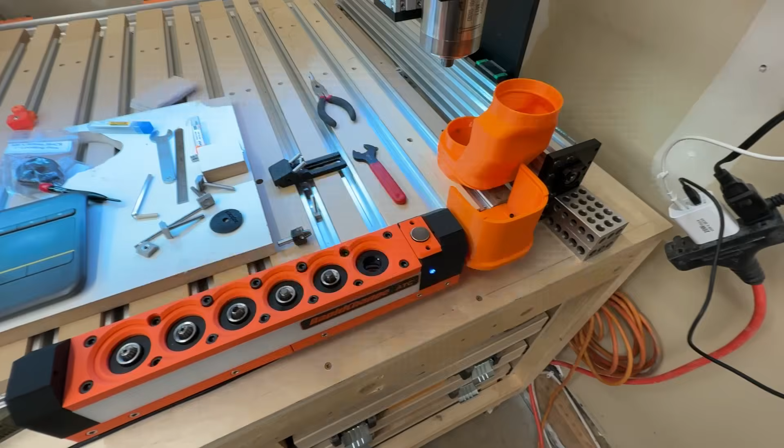All right, so back in the shop after a nice long weekend. Hope everyone enjoyed Canada Day. I know there's 4th of July coming up as well. So hopefully everyone has some nice time with friends and family.

But I'm back out in the shop today, and I've reprinted my Dust Boot docking system, and I need to get that set up. But in order to do that, I need to relocate my tool changer. So I've moved it over to allow for the Dust Boot dock. I'm going to deal with that in a little bit. But for right now, what I need to do is reset up my RapidChange in its location.

I'd seen a couple of questions around how, I bought this thing, now what? So at this point I kind of wanted to go over a video on the next step, so you physically have it connected.

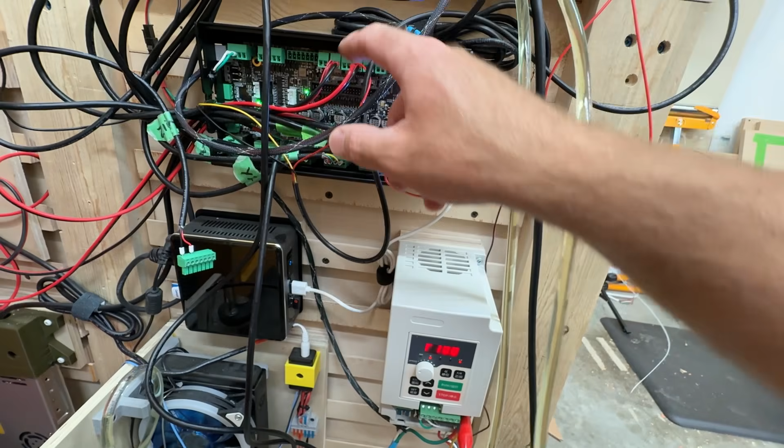In my case, I'm using the tool length sensor port on my Super Longboard and a 24 volt power connection that was available on the longboard. I went over this previously, but basically I'm using this one pin right here, and then over on this side going to the tool length sensor and ground on this port over here, so just stealing 24 volts on this one. I need to clean up some wiring - I've made a few changes and just need to clean some things up. But yeah, 24 volts off of one of the switch pins, and then the tool length sensor and ground pin on the tool length sensor port.

So that gives me power. A couple things to double check when you first have it set up. In my case, I have the RapidChange ATC Pro, not the Premium. The Premium has the dust cover. The Pro has the IR sensor, so there's a break beam sensor between this point and this point to detect collet nuts, and I also have the tool length sensor.

So the setup that I'm going to show you today is mostly for - will it work with an 8 socket setup? Yes. Will it work without the tool length sensor? Yes, there's just some differences, so just keep that in mind. I'm setting it up specifically with my 6 pocket with tool setter with the IR beam break sensor.

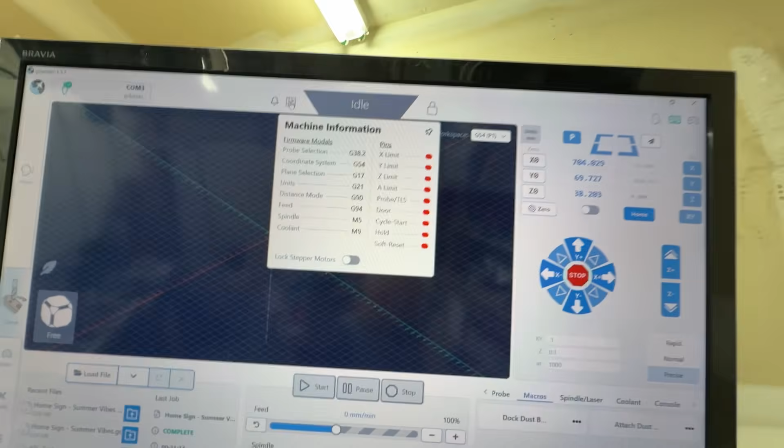One of the first things you want to double check is - I'm using G-Sender, I've got the machine homed. So what I'm doing right now is just putting my thumb in between the socket, and the idea of that is to check that the break beam sensor is getting picked up. So in this case it is.

The next test you want to do is just push down on the tool length sensor. So this light changes from blue to red. Up on the screen, again, we should see that the probe TLS triggers. So that's how we know that we've got it wired up right, and we're ready for that next step.

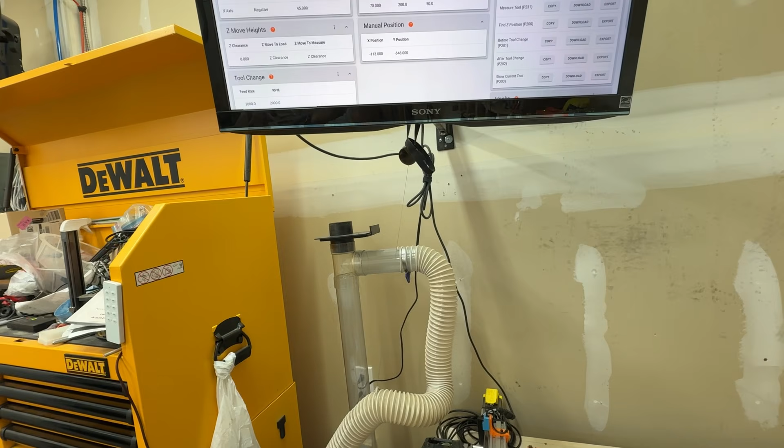So the next step is going to involve using the website. If we go over to - cancel this, I was setting up something else - dashboard. So if we go over to the website at services.rapidchangeatc.com and you log in, you'll be asked to activate your RapidChange magazine. I've already activated mine. You'll get an activation code in the box that allows you access to the portal.

As well, you can pick what controller you're using. Again, in my case, I'm using the Super Longboard, not the external version, just the regular Super Longboard. If you are using the Super Longboard, there is a firmware here that you do need to install. This firmware allows for the SD card to work. If you don't have this firmware or you're on a previous firmware, your SD card on the Super Longboard will not work, and the macros and pieces like that aren't going to function properly. So make sure that you do the firmware update. I'm not going to cover that in this video, but you do need to do that.

So from here, I've got a couple profiles started already, but I figured I would just make a new profile and show you what that looks like. Oh, you know what - it says I'm at the maximum number of profiles. Apparently you can only have 2, so that's fine. This one was a work in progress anyway, so I'm going to delete it, and we'll make a new one. So if you had no profile, you're going to start - it's going to ask, in my case I have one, so I could copy it, or I could just use the default. I'll use the default for now, and submit. Give it a name, and then whether you're in inches or millimeters. I'm in millimeters, so I'm going to submit that.

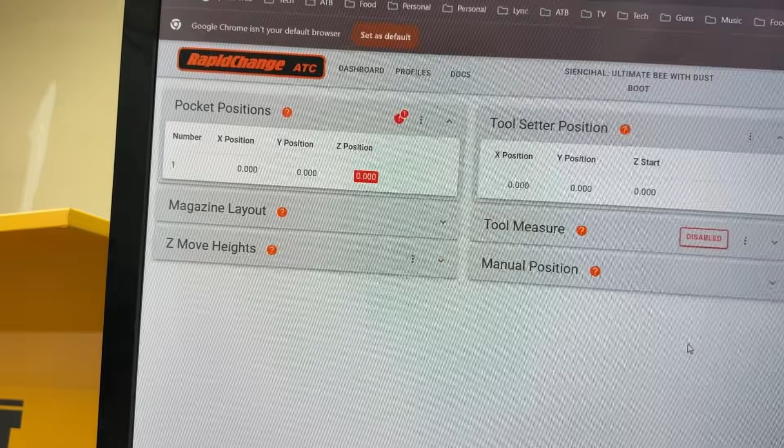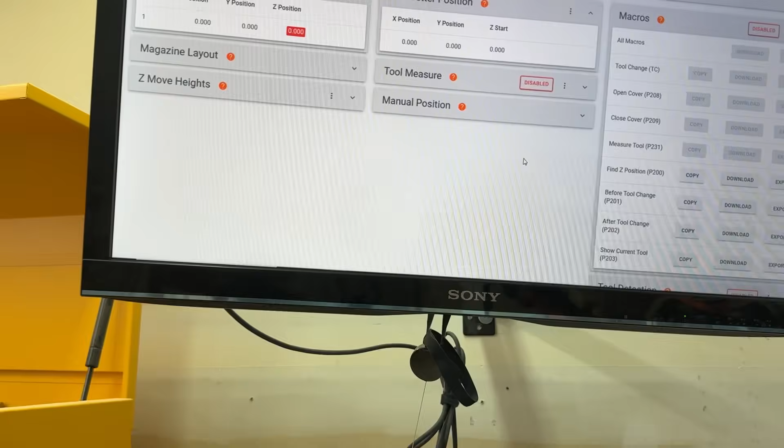And then it's going to refresh, and this is the page you're going to get. So initially on this page, what we need to do is determine the pocket 1 or socket 1 X, Y, and Z positions. I'm going to show you how I do that on mine, as well as how the manual shows you to do it.

Just because I ended up having to print a new top cap because my spindle is quite short, this would probably work in both cases, but my socket, I have a lot more access to the pockets and to see the nuts and collets than you would if you didn't reprint this top cap. So just keep that in mind when I'm going through it.

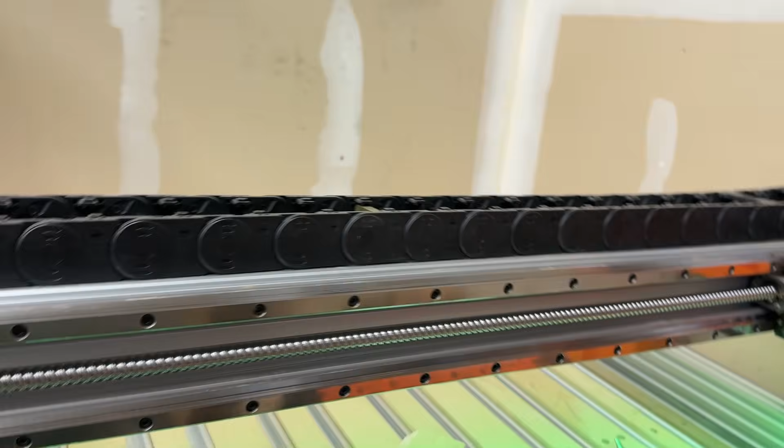But I will show you what both of those would look like. So what we need to do is figure out the machine X and Y and Z positions to get started. That's the first thing we need to do. So in my case, I'm going to go back over to GSender, and I'm going to home my machine. The reason I want to home my machine is just to make absolute sure that I am where I should be.

Because what we're going to do is we're going to tell the machine where to go. So right now you want to make sure that your end stops are nice and tight. Nothing on the machine is changing. You're happy with where your RapidChange ATC is, because if you move anything, the magazine or the end stops, all the machine positions change, and you will have to relocate the magazine.

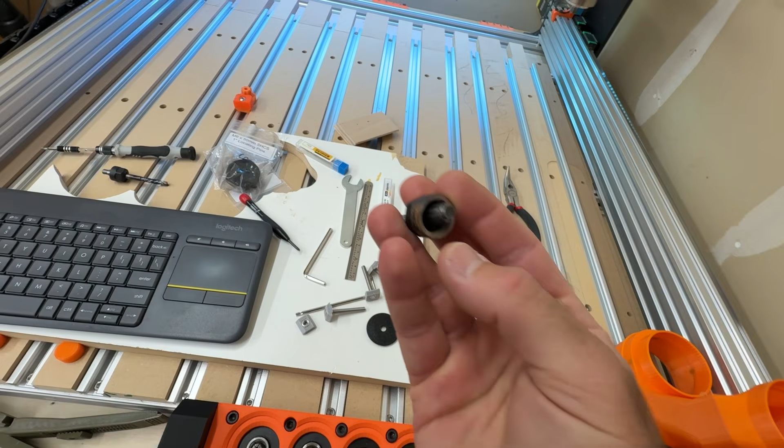So what I've got here, I'll just pull this out, is a standard collet, nut and collet for a 1/4 inch. And this is the included locator pin that came with your set. So in your spare parts and pieces, you should have a plastic piece that says locator on it, and you should have this 1/4 inch pin. In my case, I've got it loaded up in a collet and a nut, and I'm just going to drop that into pocket 1 of my magazine.

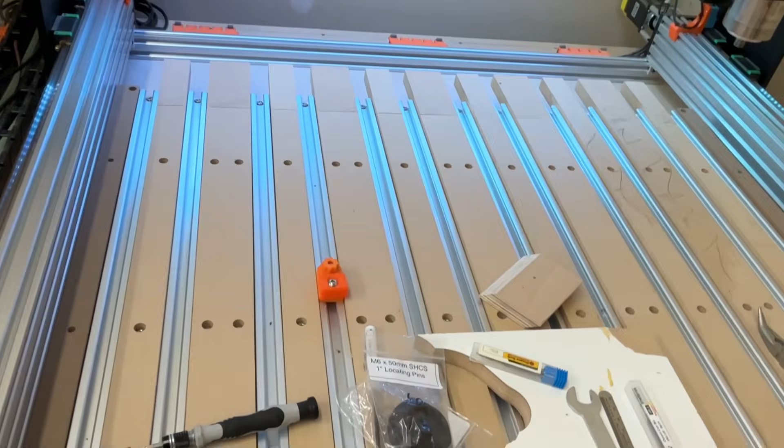Okay, so with that done, I'm going to bring my machine forward. Move over in the X.

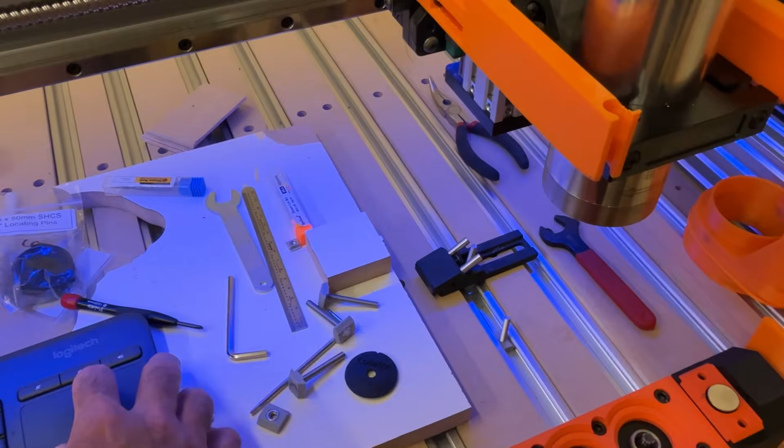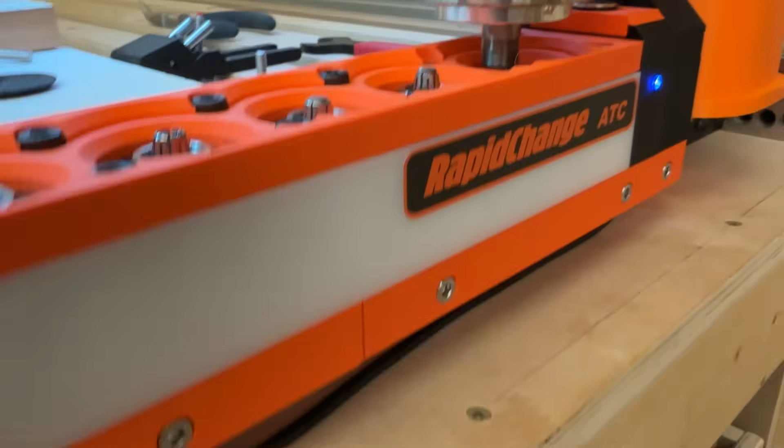So basically what we want to do right now is get it mostly close. Okay, so that's maybe a little too close. I've got it now set to precise, so I've just changed it down to precise. I'm moving 0.5 on the X and Y and 0.1 on the Z right now. Like I said, I maybe got a little too close, so I'm just going to bring my Z axis up here a little bit. There we go, yeah, that was silly.

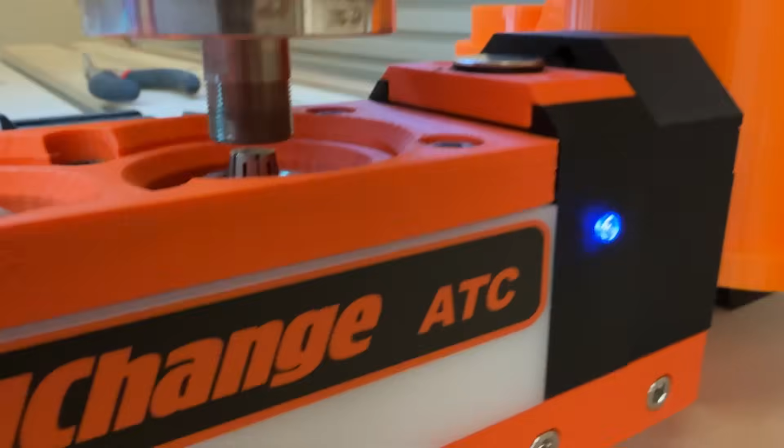Okay, so go to precise. So what we're going to do in my case is I'm just going to get the spindle, go the right way here, to sit over the collet and nut. And then I'm going to bring it down slowly. What I'm looking for is just a nice, it should be centered, sorry about that, should be centered in that pocket and over the collet.

And then bring the Z down a little bit more. And I'm just looking to make sure that it kind of sits on top of, the spindle neck sits on top of that collet nut nicely, which in my case, I think I'm pretty much there, which is good. Okay, so what I'm going to do, point one, so let's go. That looks pretty good.

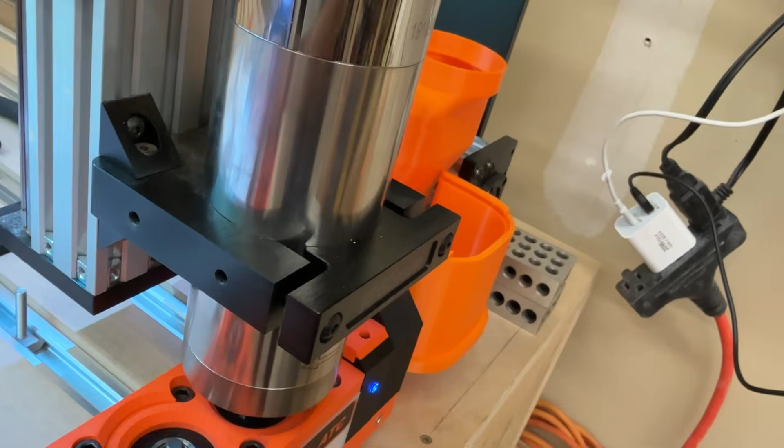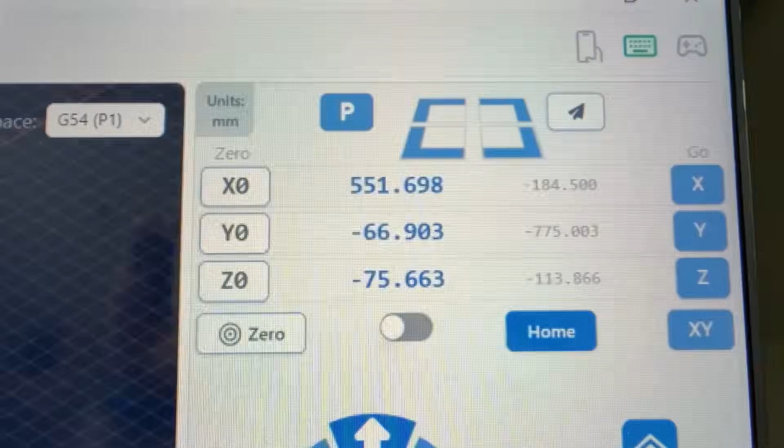Okay, so once you're happy with that, what you're going to do is you're going to look on GSender and you want the gray numbers. So you can see X is at negative 184.5 and Y is at negative 775. I'm not going to worry about the 0.003 right now.

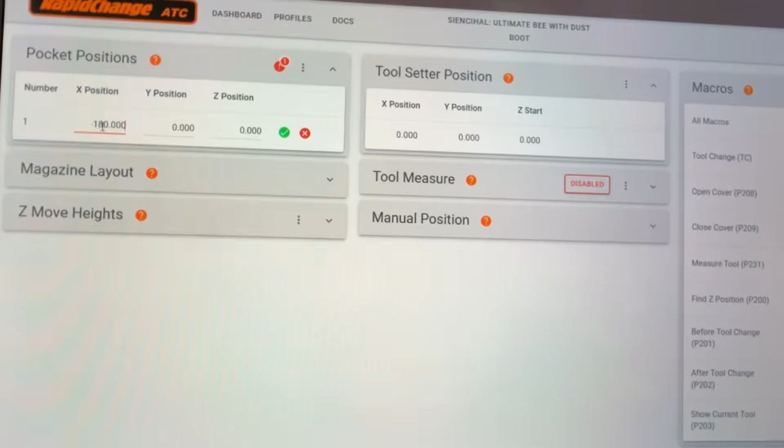So back on the RapidChange ATC page, I'm going to put in the values that I just got. So negative 180, just double check that, 184.5, and tab negative 775. Okay, so now I've got those two positions laid out. I need to figure out my Z position. I'll do that in a second.

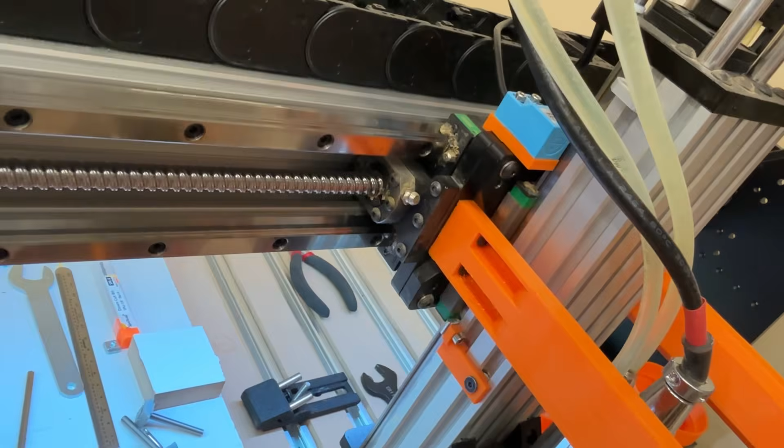Okay, so I've saved that. Now back on GSender, I'm just going to raise this up. So if you were using the regular top cap and not this low profile one, you would take the locator pin and you would put it. Sorry, I got to pull this out here, give me 1 second. So you would take this, set it on something flat.

Okay, so you would get it set up so that it looks like this. And then you're going to put this into your spindle. Sorry, you can't see that, I guess. So you're going to put that into your spindle.

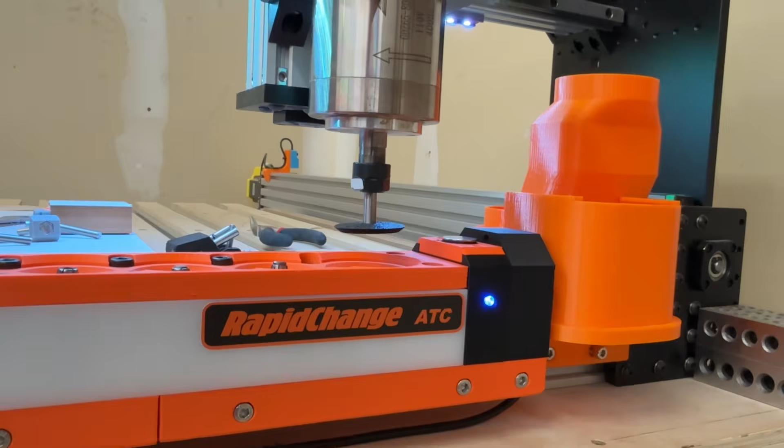And you want it reasonably tight. You don't need to crank down on it, but you do want it to be snug because we're going to use it for a couple things. So once you've got the collet nut with the locator pin, basically what you're going to do is on yours, if you've got the regular top cap, same idea, you're going to bring it down.

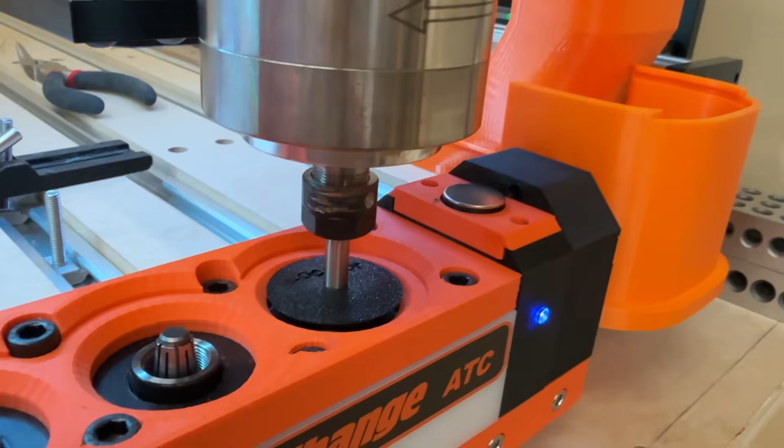And that top cap's going to sit just nicely in the magazine pocket. Like I said, in my case, because I have such a low profile top cap and I've made room for my short spindle, I don't find that this locator is as accurate as I needed it to be. So I found that my method of seating the collet and nut onto the spindle shaft worked a little bit better. So yours, if you haven't modified it, will have a nice tall top cap with the pocket being a lot narrower, so it should work much better.

So once you've located it, then you're going to bring up your locator and just wiggle it off. You can leave this on. So we need a collet nut for this next step. And basically we're going to drop it down into, not into, but just before.

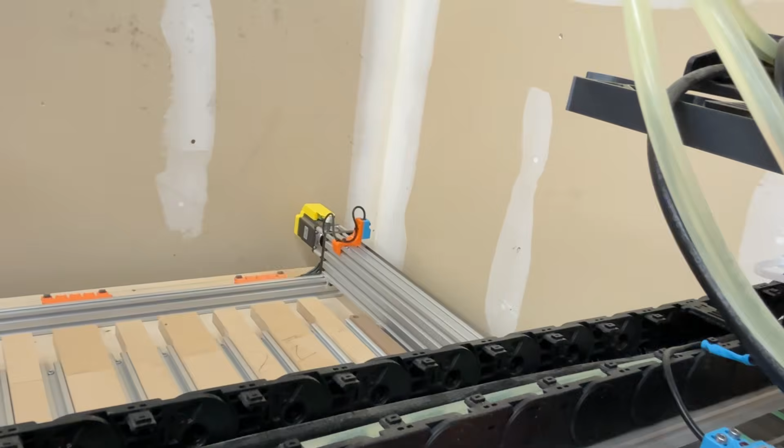So what we're looking to do, on the Pro versions anyways, is just barely break the beam of that IR sensor. So now I've brought it down. So in GSender, if I click this, you can see that the IR sensor isn't triggered yet. So I'm going to keep bringing the Z down. Okay, so I've brought the Z down now, and you can see that the probe TLS is broken.

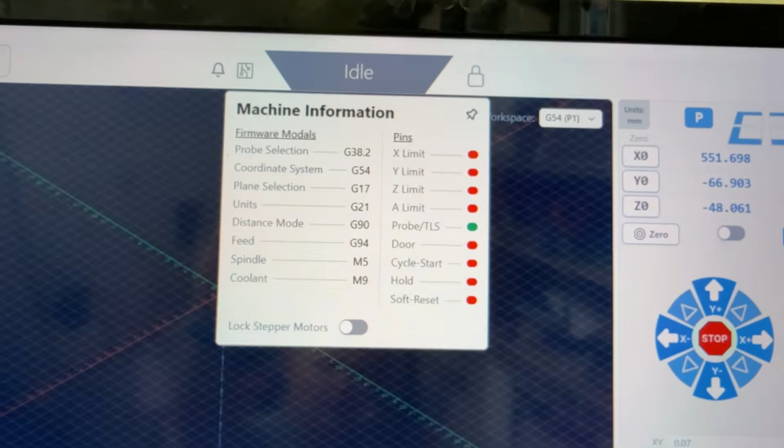So what I want to do is I want to raise it up now. It's a little bit finicky. Okay, so now we come down. So you can see that now probe TLS is triggered, so that IR sensor is broken.

So if I raise it up 0.01 millimeter, so in this case that's what I'm moving on my Z, I can see that it's not broken anymore. If I come down 0.01 millimeter, now that sensor is broken. So bring it back up and then record that value.

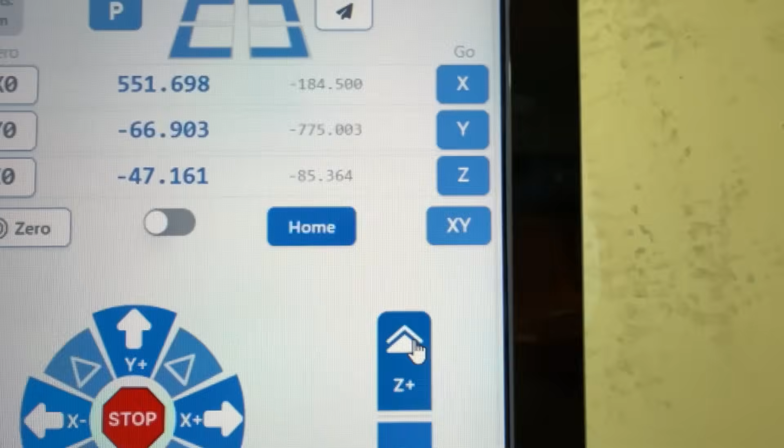So negative 85.364. Go back over to your website and we're going to edit this position to negative 85.364. Delete out those extra zeros. Just double check: negative 85.364. Okay, we're going to save that.

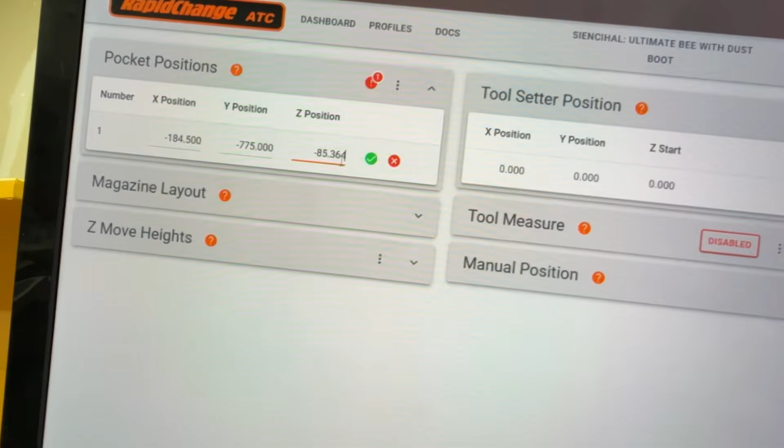Okay, so we have located our pocket, which is awesome. So with pocket 1 located, what we want to do is set our magazine layout. So we currently have it in the x-axis. My magazine runs along the x-axis. If you had your magazine set this way, you would set that value to y. And then we have to figure out if it needs to move in a positive or negative direction.

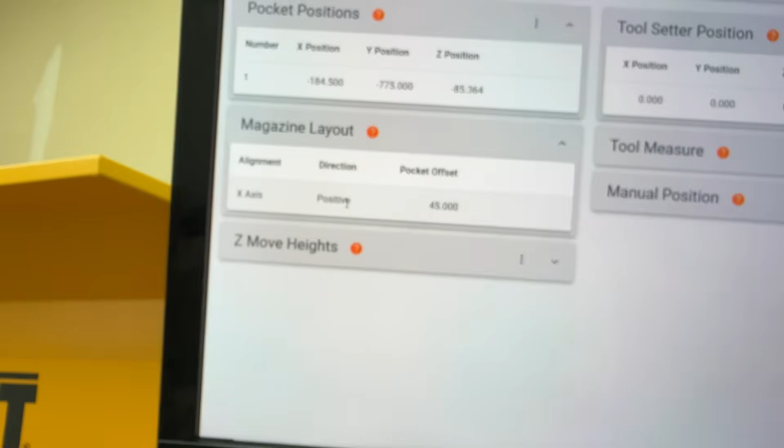So the easiest way to do that, if you're not 100% sure, is go back over here. We'll just go to normal. So I'm in pocket 1 right now. I'm going to raise up my Z so I don't break anything. Now to get to pocket 2, what do I need to do? Well, I need to hit the X negative button, right? So to do that, I go X negative. That'll get me to pocket 2.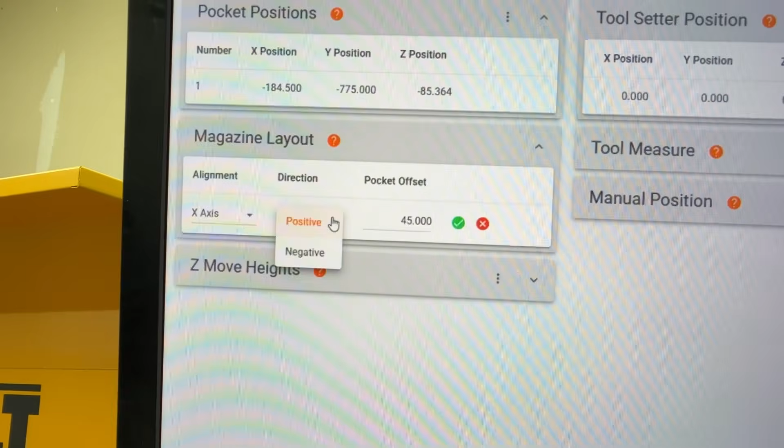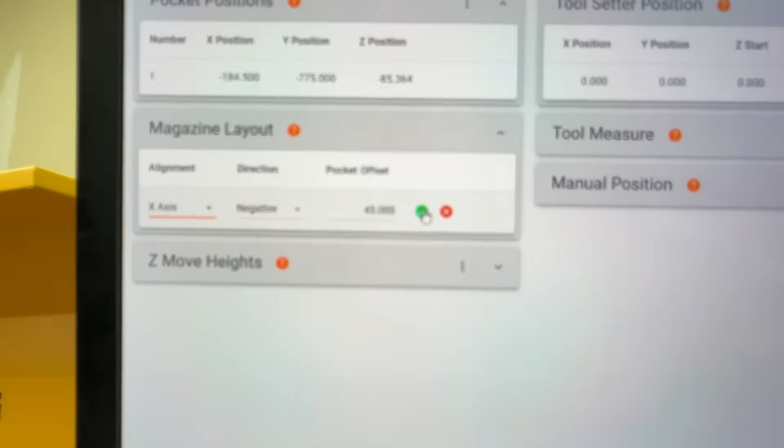Okay, I'm moving negative. So if I go back to the website now and I change this, direction X is correct to negative. So again, if you had a y-axis alignment, you would change this to y. But because we're across the machine, we're X, and we're moving in a negative value to get to the next pocket. Pocket offset is a standard value. You may need to tweak this in special cases, but for the most part, that is how it's set up from the factory, so factory shipped I guess is probably the better term. So I'm going to say okay.

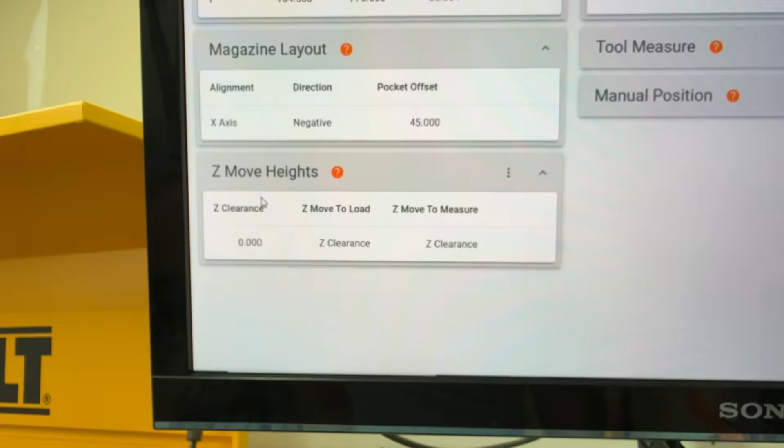All right, so now we've set out our magazine layout and we have our pocket position. The next one is the Z move heights. For mine, and what I would recommend, is leave this at 0. Basically 0 means every time it does a bit change, it's going to move to the top of your Z axis and then come back down. So even if it's going from pocket 1 to pocket 2, it'll go pocket 1, raise all the way up, and then move over to pocket 2 and come all the way back down and then raise all the way back up.

It does slow things down a little bit. Once you're more comfortable, you could come in and change this to tighten it up so it only moved as high as it needed to. But certainly for the initial setup, I recommend leaving this at 0.

Okay, so the next one is my tool setter position. In this case, I have a tool setter, so I want to tell the machine, or tell the macros, where that tool setter is.

So for the tool setter, again, I'm going to go back over to G-Sender. I'm going to raise up my Z-axis just a little bit, and I'm going to move over. I'm using G-Sender, just the jog wheel, and I'm moving it over, and then I'm going to come down a little bit.

And I'm going to change to precise, I think. We just kind of want to get in the middle of the tool setter button, basically, so that when the tool comes down, it's hitting the tool setter sensor and can get a read.

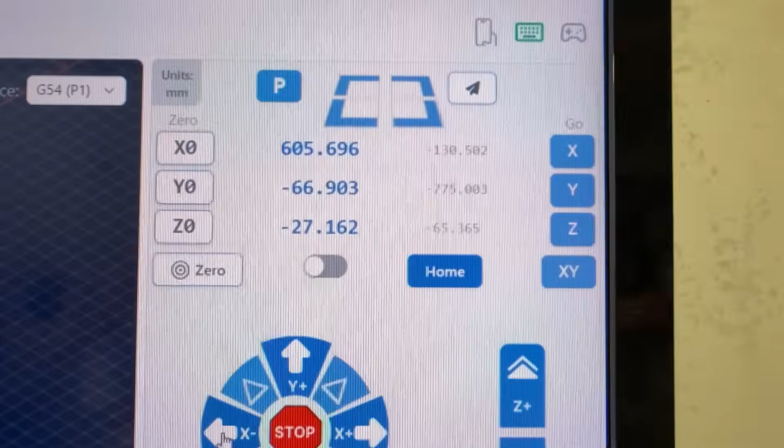So once we're happy with that value, we're going to again go look here. So we've got negative 130 and negative 775. Over here, my X position is negative 130. I think it was 0.5, but let's just double check. Negative 130.5.

And then minus 775.0, which I didn't move.

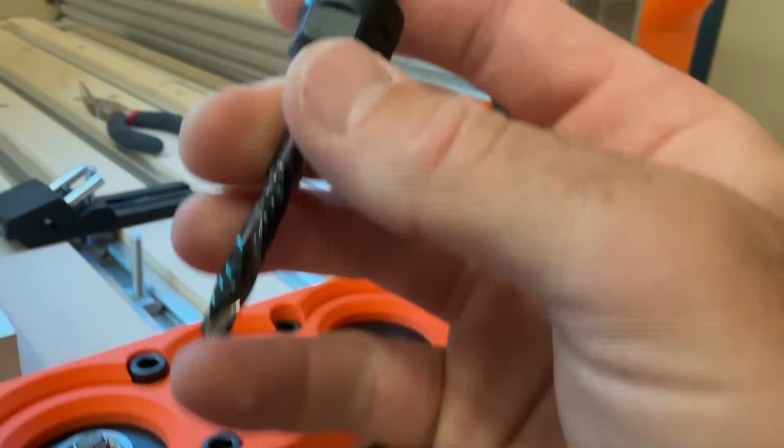Okay, so then the Z start. Basically for the Z start, what you have to be careful with here is that if you set this too low of a value, you run the risk of crashing your bit. So this is one of my longer bits. I do have a little bit longer one, but this is one I generally use as a high water mark.

So if I was to load this like this, it would crash. You can see I'm hitting the side of the tool setter. So what's going to happen is it's going to bring the bit over and run it down really fast and just crush the tool setter.

So that's no good. Okay, so we can't leave our Z-axis in this position. We need to raise our Z-axis up enough that this bit will fit and not crash, and have enough wiggle room that if we were to put a longer bit in there, you wouldn't run into problems.

So you want to have this as high... you don't want to have it right at the very top, but you do want to have it reasonably high so that you can accommodate your longest bit, basically, is the rule of thumb, with a little bit of margin for error. So I'm going to raise that up maybe another 5 mils and just kind of double check this.

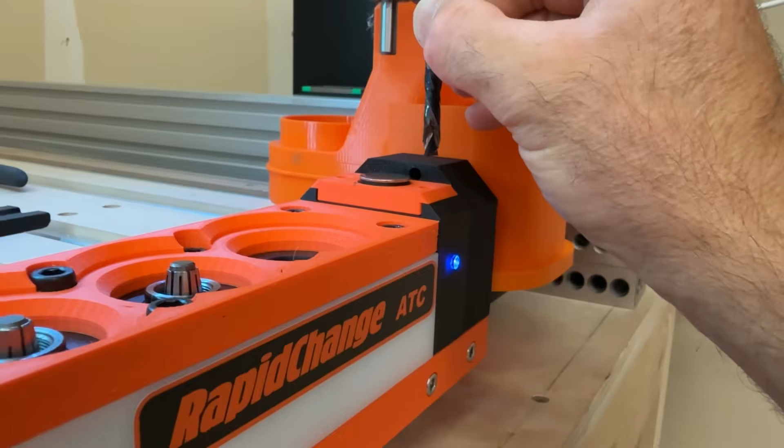So that's pretty good. I could even come up a few more just to give myself a little bit more wiggle room, but I think that's pretty decent. I think that's pretty safe. So again, check it with your longest bit.

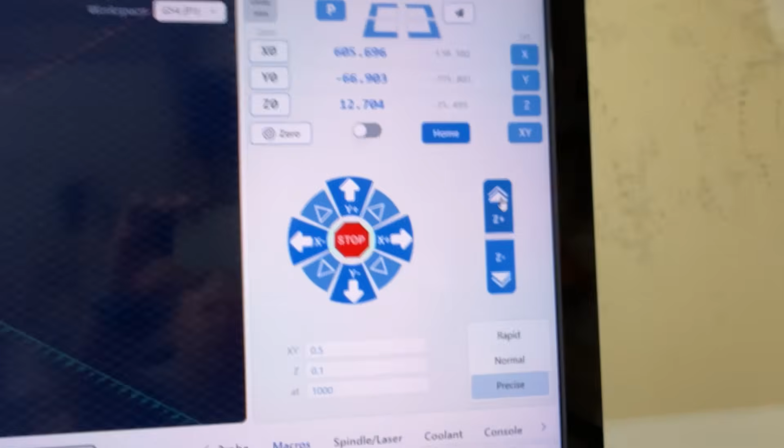So I'm at negative 25.5. What I think I'll do is over here, I'm just going to say negative 25. Okay, I'm going to say okie dokie. Now, tool measure is disabled. We want to enable that, so I click the 3 dots, I turn off disable, and I click apply.

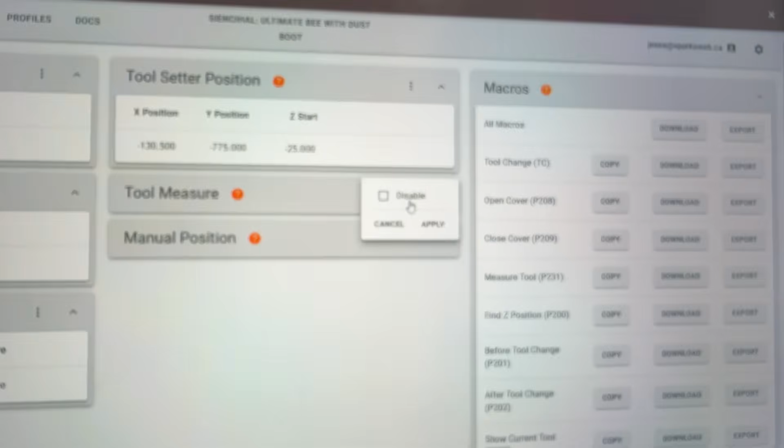Then I can make it bigger, and then it's going to ask me what the seek distance is—how far down should it try to seek? At current, it's set to 70 millimeters. We can do this with a ruler. Okay, so if I have...

How far down is it going to seek? So basically what I want to see is roughly from the end of the nut to the top of the tool setter, do I have more, or sorry, do I have less than 70 millimeters? So that is pretty good. I'm basically 70, 65 millimeters to the top of the button.

And what we want to do is make sure that this value is big enough that it can seek all the way with the shortest tool—it can seek all the way to the button. But you don't want it so long that it's beyond your Z-axis travel. So just keep that in mind.

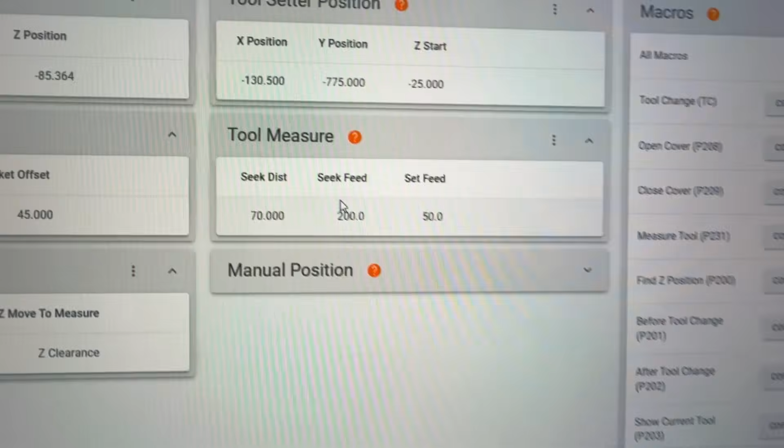So at current, 70 is pretty good. I could probably lessen that up just a little bit, but 70 is fine. And then the seek feed value is how quick it's going to do it—how quickly it's going to do that initial plunge down to the button, and then how fast it's going to set when it does the second touch off, what it's going to set that to.

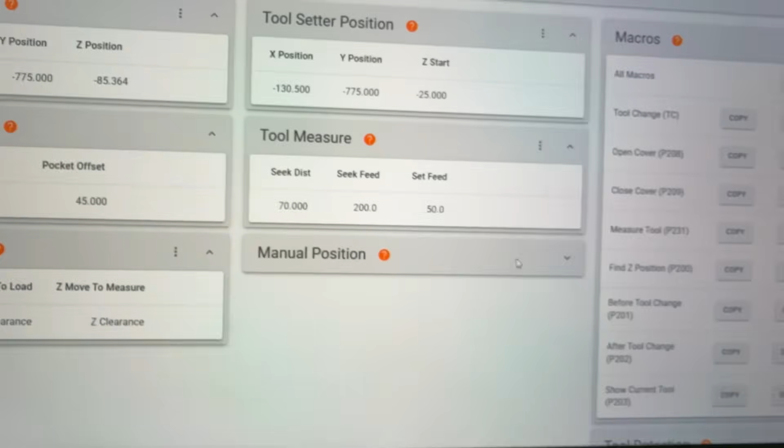Okay, so the last piece we need to set is a manual bit change position. You can basically set this to whatever you want. It's somewhere on your machine—it's just a machine value that is where you will do manual bit changes.

So if I switch this back, just do normal, move this back. So where would I like to do a manual bit change if I had the option? I would probably choose to do it somewhere here on my machine, that's probably easy enough. And you could change this in the future if you don't like it.

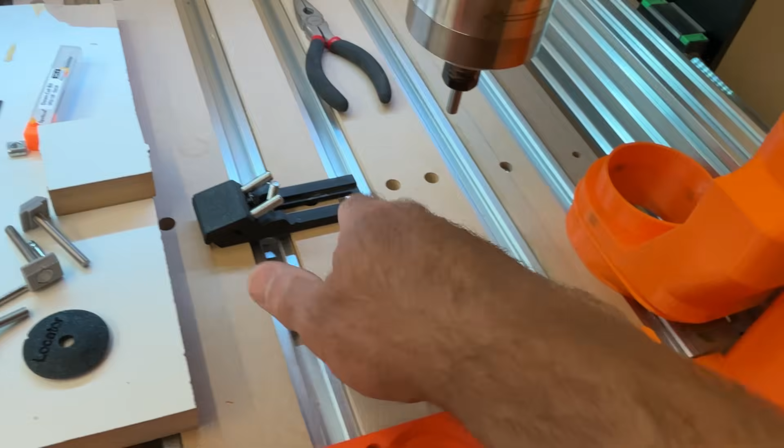I like it because if I drop the bit, it's going to hit the MDF spoil board, not into an aluminum slat. It's far enough out of the way that I should be able to work the wrenches and collect the bit without being in the way. So I'm happy with that location.

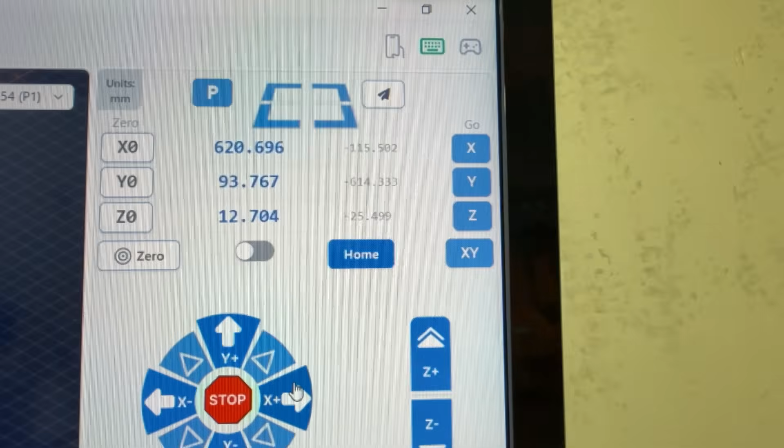So again, I'm going to go over here. I'm at negative 115.5 and negative 614.333, but that doesn't really matter that much. So let's go over here, under manual position, X. We're going to go negative 115, and again this is kind of rough numbers because it's just where it's going to park it, 614. Double check that. Okay, so I'm happy with those values. Great.

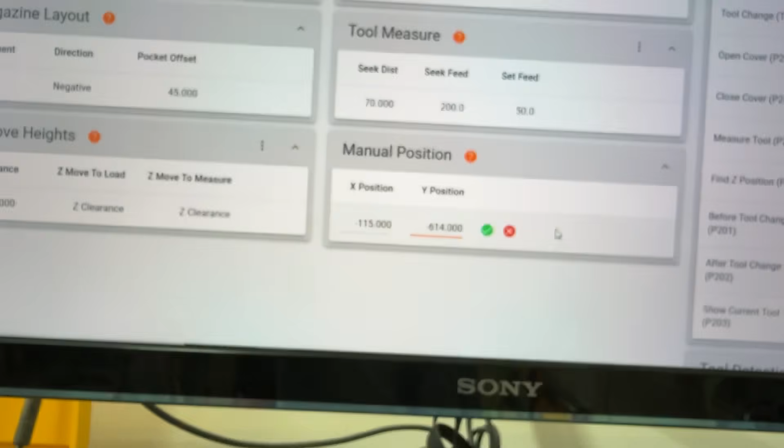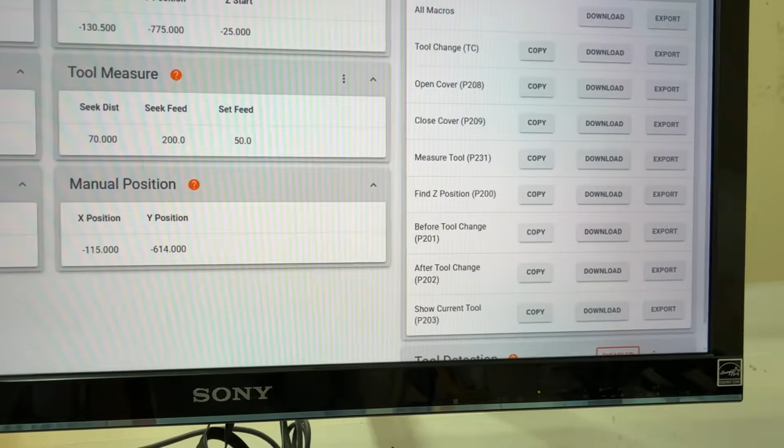Okay, so that's a good chunk of what you need to set up. Now, one thing I did find, and I think the RapidChange ATC team is going to change this, but there is nowhere right now to set the spindle speed. So I want to turn on two things.

In my case, because I'm going to work on my dockable dust boot later, I'm going to turn macro hooks on, and I'm going to come down here and turn tool change on, and I think everything else is fine. Yeah, turn those two things on and hit apply.

And so then you'll see I get another box here for tool change. This is where you can specify your RPMs. So the feed rate is how fast it's going to move when it's doing a tool change, getting in position, moving things around, but also the RPM of the spindle.

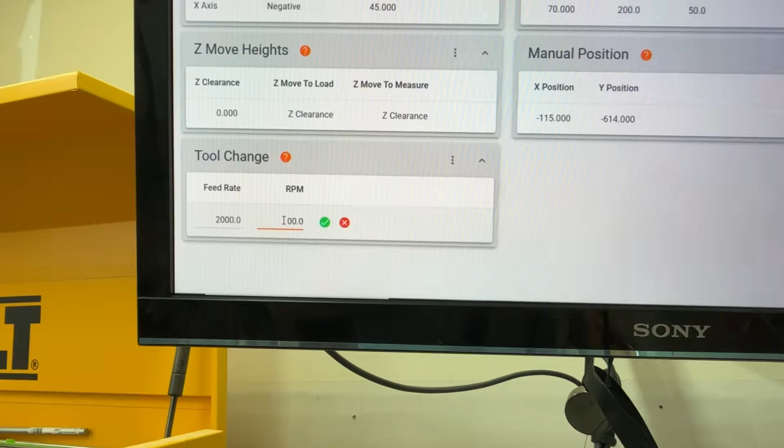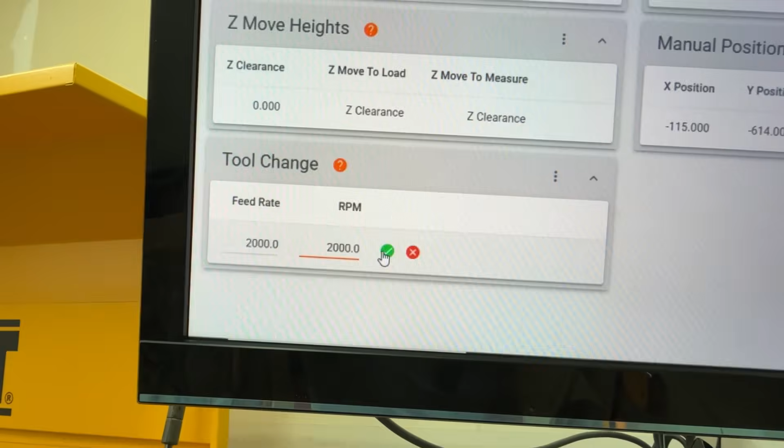I think the max on this is about 2,400 RPMs, and again that's 2,400, not 24,000. We're trying to spin pretty slow. I believe that I read that if you are over 5,000 RPM, you can do damage to your sockets. So definitely double check that you're under that.

I just bought a cheap tachometer from Amazon just to verify. I think this is a $20 one or something, just to verify that the reading I'm asking for is what I'm getting, so that I was sure that when I set the 2,000 RPM value, I was actually getting 2,000 on the spindle. It was just a good sanity check so I don't break things.

These are replaceable, so should you accidentally run it too fast and strip one of these out or shatter them, you can replace them. In fact, you get a couple spares in your goodie bag. But I would rather not wreck them if I can avoid it. So keep that under 5,000.

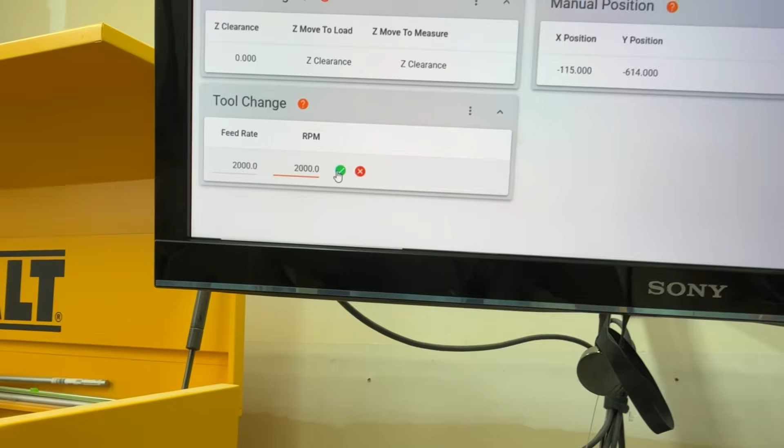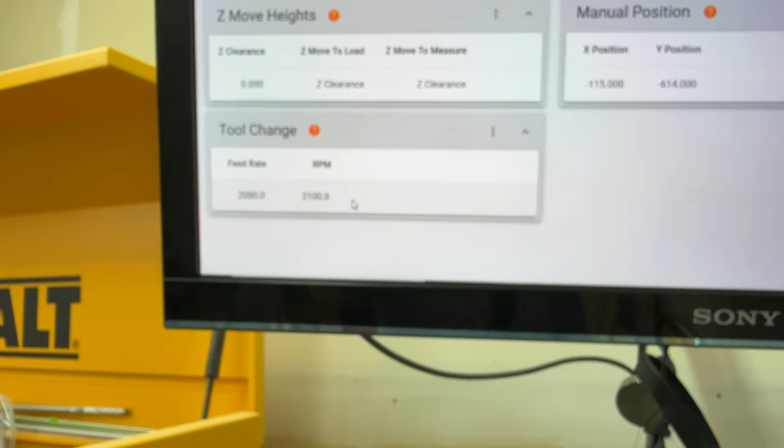So what I understand is I have an 800 watt spindle, and it requires a little more RPM to get the same amount of locking torque. So I'm going to go with 2,100 RPMs. If you have a 2.2 kilowatt spindle, I think you can be down in the 1,200 range. And if you have a 1,500 watt, I think you want to be in the 1,500 range. But there are some details there.

So the other thing that I want to do on my specific setup is under tool detection, I want to turn this on. So I want to uncheck disable and click apply. And then when I look at the tool detection, you can see that the Z target is the value that we had, the minus 85.364, which is the value we found in the original.

And then there is a Z start, which is negative 103.364. Basically that's a calculated value that for the IR break beam, it will use the IR break beam to check for a collet nut. So basically, did it load the collet nut? Is the collet nut there when it shouldn't be, or is it not there when it should be? So it's just a way for error handling to happen.

Again, this is on the Pro model with the IR sensor. So I definitely want to turn that on so that it can check that there is a tool loaded.

So the other thing I turned on was the hooks. I'm going to do this after, but this allows me to set up a macro for before tool change and after tool change. So when I set that up, it'll bring the spindle over, get it set up in the dock, and then come out, and then it can finish with the rest of the tool change. So I'll do that as a separate video later.

This is already getting pretty long, but now we have all of our stuff set up. You can see these are basically all the macros. So here's all the macros: the tool change, the TC macro, P208 is the cover open, if you had a cover close.

This is the important one, or one of the important ones, P231. That's the tool measurement macro. So basically these are all going to go on the SD card. What I'm going to do now is turn off my Super Longboard and pull out my SD card.

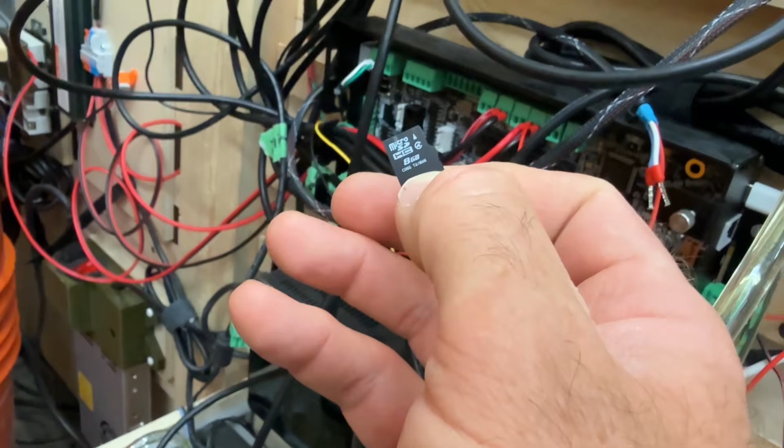This is something you'll need for the setup. This is an 8 gig SD card, or micro SD card, the little itty bitty ones. They recommend going under 32 gigs. I'd say a 16 or smaller is going to give you less grief. 32 sometimes can be a bit of a problem. So if you can get a 16 gig or smaller, that's what I'd recommend.

The macros are super small, so you could probably get away with a 2 gig and be fine.

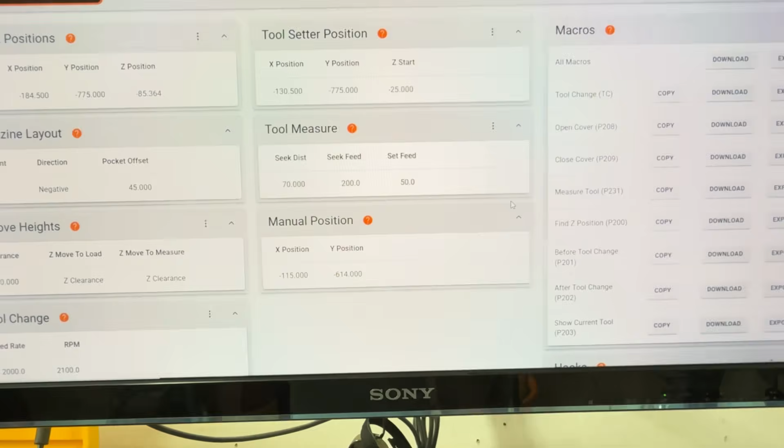So I put the SD card into my computer, and I'm just going to go up on the website to export, making sure my SD card is selected as the destination. I'll put it on the root, select folder, and it's going to say generating macros. File exported successfully, up in the top corner, is what I get.

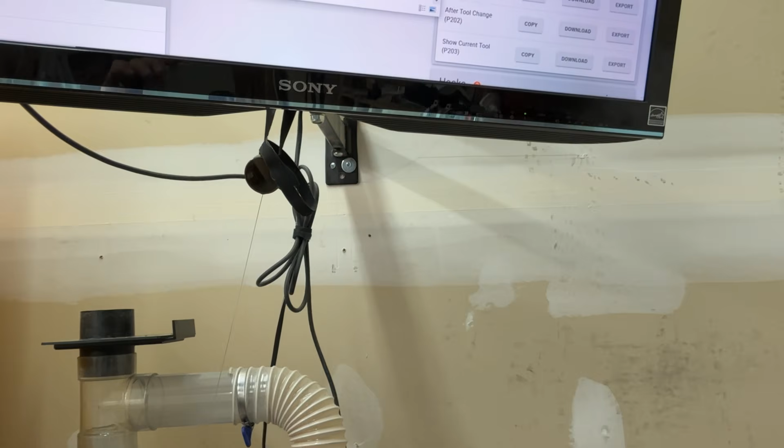At that point I can go and look. If I open up my Explorer view, I can see I've got several macro files that were written today - the P200 macro, 203, 231, TC macro were all updated today. This was one I was playing with. This 201 is before tool change, so I haven't updated that in a while, since I was playing with the dust boot before.

So now that we have our macros on our SD card, we're going to eject them, which makes it safe to remove from the computer. I'll pull it out of the PC and put it back in the Super Longboard.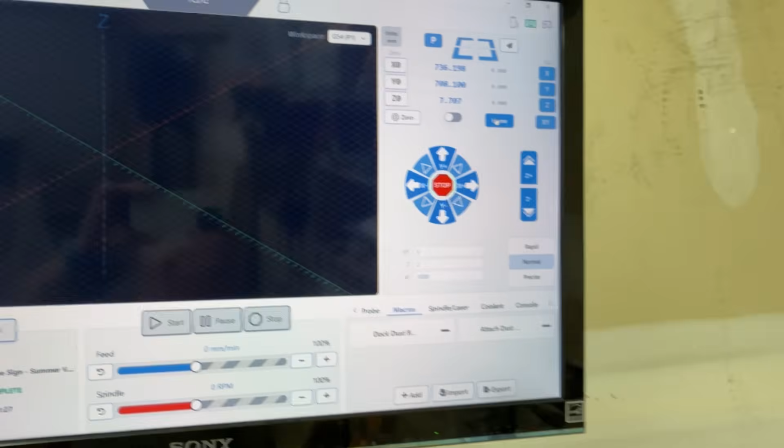So basically this next step, we're going to actually try to change the tool.

Okay, as you can see, I already have a tool in the machine. The thing to keep in mind, and it's very important, is that when you first reboot the controller for whatever reason, whether you hit the e-stop or whatever, it will forget that it had a bit in it, and it will forget the bit length. So you cannot assume it knows what you have in there.

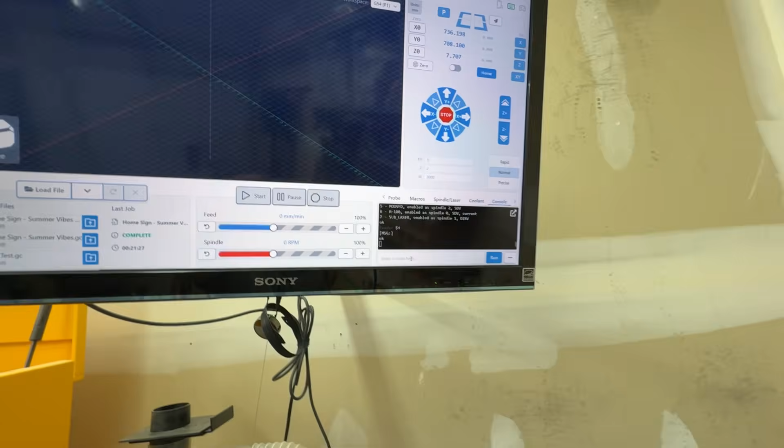So I have bit 1 in there. There's a manual command to do this. If I go to G-Sender and go to console, I can tell it that there's a bit. On the website it says M61 Q2 would set for tool 2, but I have tool 1, so what I want to do is M61 Q1. I'll go back here on my console: M61 space Q1.

Let me do this for now: Q1. I'm going to hit enter, and it's going to say okay. Basically it's just saying, yep, I have that. So then what we want to do is call the tool length macro.

So G65 P231 - G65 space P231. Okay, what this is going to do is move the machine forward and do a tool length touch off on the tool setter. This is the first time we're running this, so I recommend having your hand on the e-stop if something goes wrong.

So the machine's moving forward. I've got my hand on the e-stop just in case. It should come and just touch down. You can see that seek rate switched to seek. Touched off, and it's good. So now it knows it has tool 1 and knows the length of that tool.

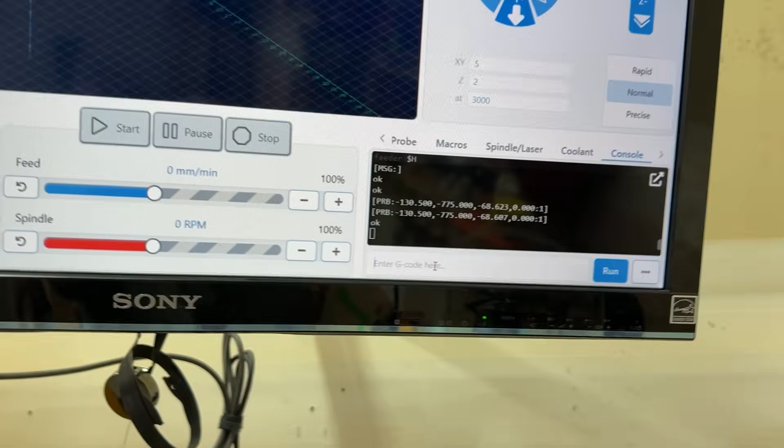Now what we can do is verify that our next piece works by going to tool 2. Okay, we're going to load tool 2 on an M6. M6 is your bit change, T2 is we're calling for tool 2. Right now we have told the machine tool 1 is loaded, so what should happen is it should unload tool 1, come up, pick up tool 2, and then do a tool length touch off. So again, have your hand on the e-stop.

I've got my T2 M6 command in the console. I'm going to hit run. Comes over.

It spins up and drops off that first tool. It's going to make sure that was the slow part there, where it was checking that the nut actually came off. Now it's going to come down.

Again, tool 2. Nice, now it's going to slowly come up and make sure that the tool is seated. If it doesn't seat the tool, it would error out and have you manually inspect. In my case, it worked. So now it's going to come over and do a tool length touch off, so now it knows the new length of the tool.

We'll do one more test and then we'll be done, because this video is getting crazy long. It's good to test to the end of your magazine, just in case there's any deviation or you've got anything out of whack. If you go to your end socket and try to pick up and it doesn't, that means you maybe started in the wrong spot or whatnot.

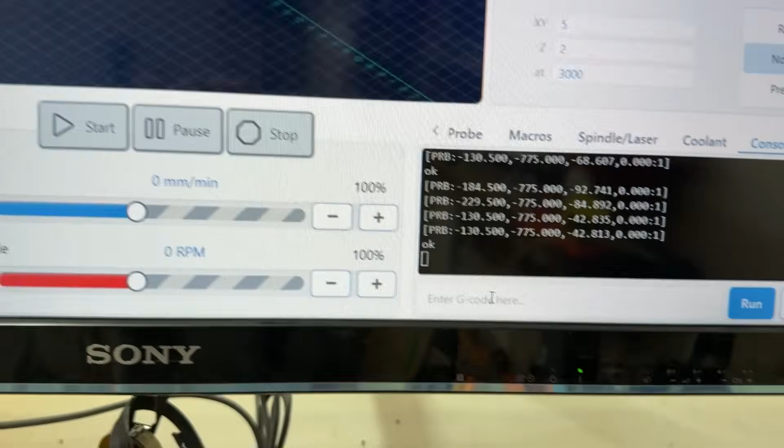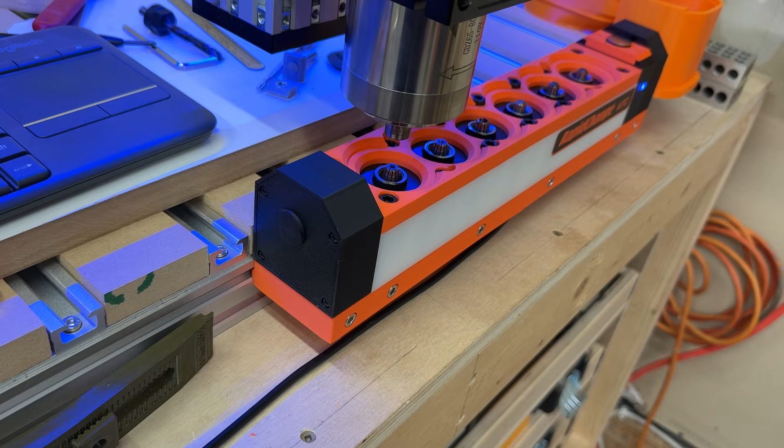So we're gonna go T6, M6. Okay, so that's asking for tool 6, M6. Enter. So again, we should drop off tool 2. Perfect. Comes up over to tool 6 position. Should double check that the collet nut is there.

You can see this is a pretty small O-flute end mill. It comes back over to do the tool touch. Once you've done several successful ones, you can go back onto the website and change those feed rates to be a little faster if you wanted to, just to speed up those bit changes a bit. But anyway, okay, so that's perfect.

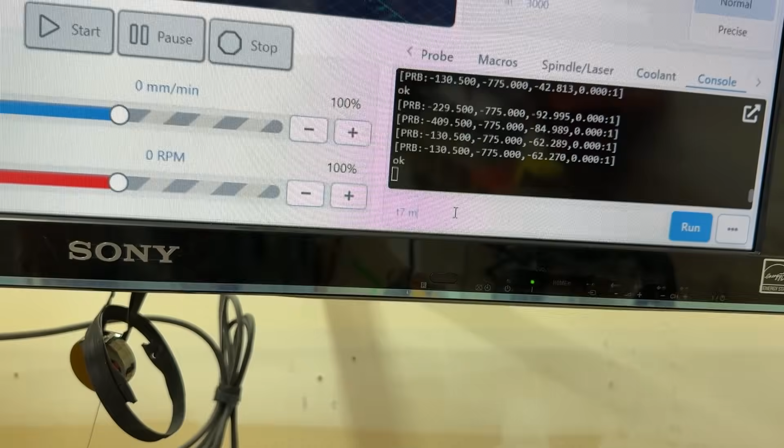So the last thing you kind of want to check, I'm going to do a T. Basically tool 6 is my last tool, so if I do T101, let's say—any tool beyond 6, so this could be 7—sure, well, let's do 7, M6. So what should happen is it'll drop off tool 6 and then go to our park position. We'll hit enter, so it's going to come over.

Drops it off, makes sure that the nut disengages. Perfect. Now it's going to move to our park position where we can do a manual bit change.

At this point it pauses the machine and sets it to hold. To resume, once I put the new bit in—so in my case here, you know what I'm going to do, I'll swap here. Now we get our wrench. Oh no. Sorry, want this tool in the caddy, in the magazine, and I'm just going to put the pin in that we were testing with earlier.

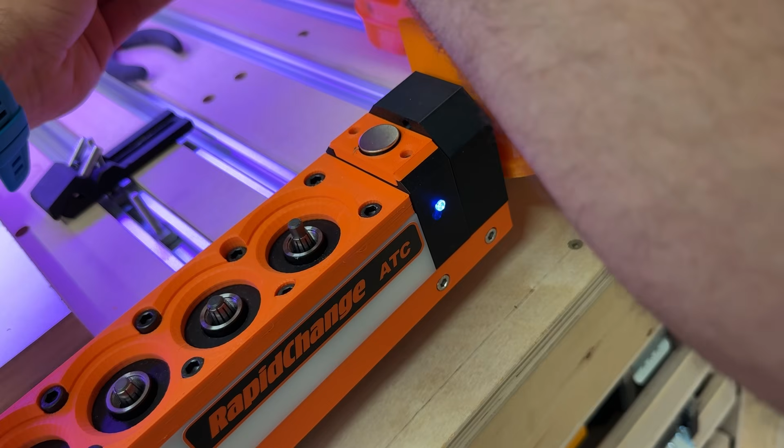See the pin, tighten it a bit. There we go, okay, so now it's held. Once we had the tool in, we hit the little unlock button here to resume, and it'll come forward.

There's our tool touch. Back up, and it's ready to machine. So that is our finished install of our RapidChange ATC.

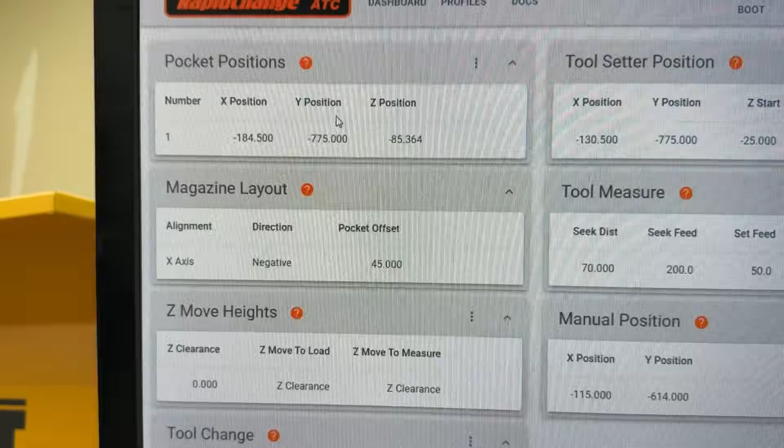There's lots of things, like I said, on the website you can play with and adjust. If you go back to here, the steps: determine your pocket position including your Z, make sure you set your magazine layout properly and tell it which direction to move properly, make sure you set your tool setter position if you have one, double check your tool measurement settings, and set a manual park position. Then if you have the IR sensor, you want to make sure you have tool detection turned on, and you can adjust these values if you need to.

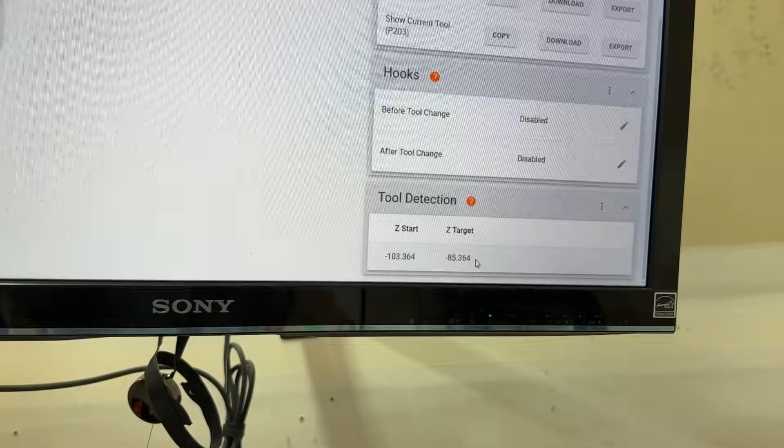If for some reason your collet nuts were a bit special and they were really long, you could adjust that value to account for a really long collet nut or something like that. Once you have everything saved and ready, you do your export of your macros, restart your controller so that it loads the new file, and away you go.

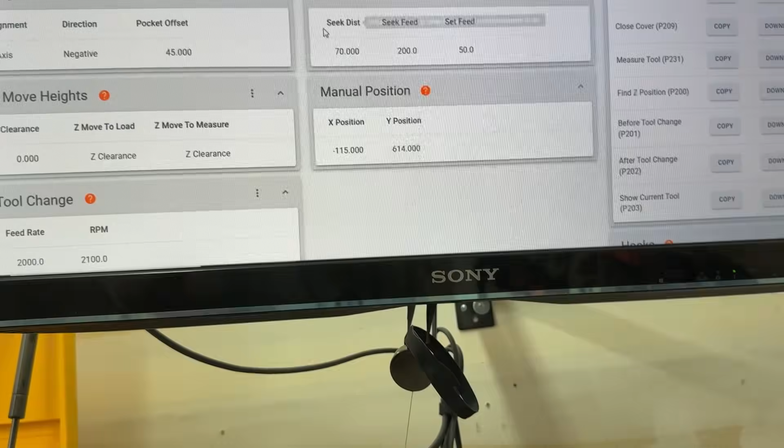So you can come back now that this profile is here, you can always come back to it and make changes. I'm going to come back later and do the hooks for before and after tool change so that it can move and position and pick up and drop off the dust boot. But like I said, I'll do that a little bit later.